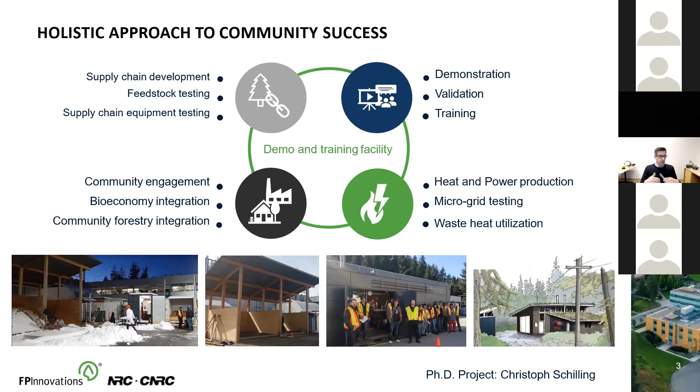I think the holistic approach that I put on the slide here is really key, that we work on all the different things that can go wrong and solve these issues before these systems go into the community, that we train. In the middle here, you have a picture from a training of Coscas members at FPInnovations, so that once the system comes to their community, they know how to operate it moving forward.

But when it comes to community bioenergy, I think we cannot talk about this without talking about the need to improve our forest management. And I think this is something that's true across Canada. I think community bioeconomy actually provides the opportunity to do that.

Again, I think this is something where we can learn and adapt from the experiences in Nordic countries and other European countries, where the solid forest sector has really helped promote these kinds of bioeconomy opportunities based on local resources. And I'm getting philosophic this morning, but there's a Finnish saying that forests are not inherited from our parents, they are borrowed from our children. And I think that's the attitude we need to develop here as well.

We don't have private forest ownership as many countries in Europe do, but I think this is the thinking we all need to start to adopt in order to be successful moving forward, and also to ensure that we're doing the right thing when we are managing our forests.

And I think there is plenty of opportunities that we're currently not tapping into. Commercial thinnings is one of those, using that material for our industrial processes, but also to power the bioeconomy in bioheat and combined heat and power projects that I just talked about. I think they can be used for pellets, for biofuels. This is a very large untapped resource that not only provides additional fiber sources, but also helps us reduce fire risks and increase forest resiliency to, for example, the mountain pine beetle attacks that we have seen.

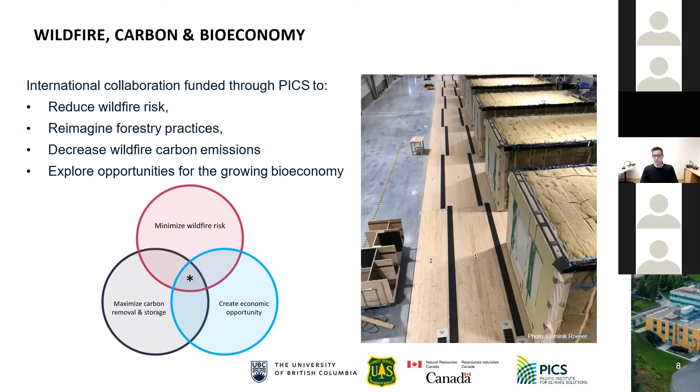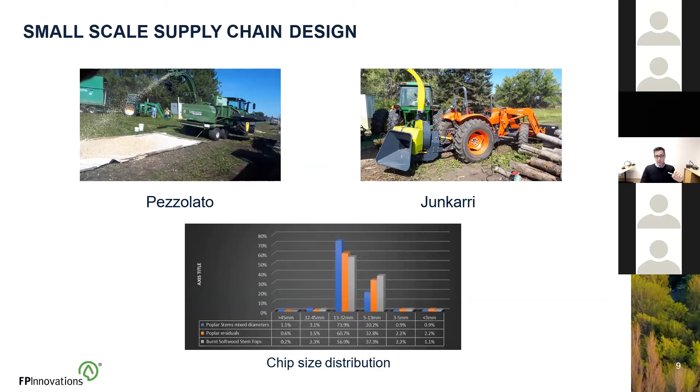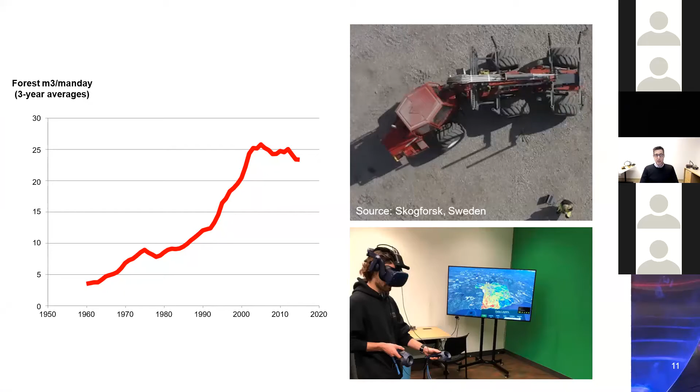But we also need to train the next generation of practitioners, and this is really targeted at a new way of doing forest management. We can see here in this graph that our productivity in forest operations has decreased since the 2000s due to all of the additional demands on our supply chains and foresters.

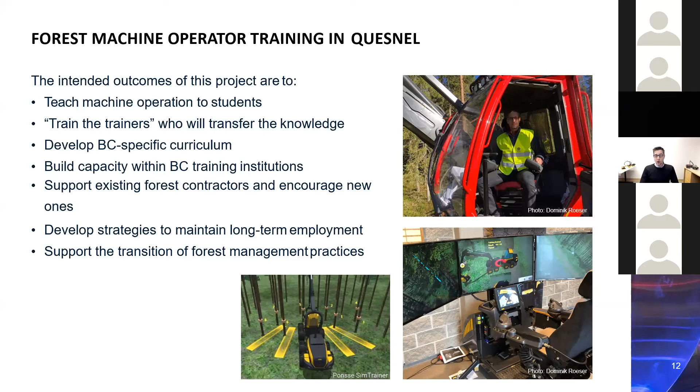That this is something we need to change, and we can change moving forward with advanced technologies and also operator training. This is again something we are working on with Quesnel, in training the next generation of forest machine operators so that they can make good decisions and know how to operate these expensive machines that we are bringing in. But I want to end with the built environment.

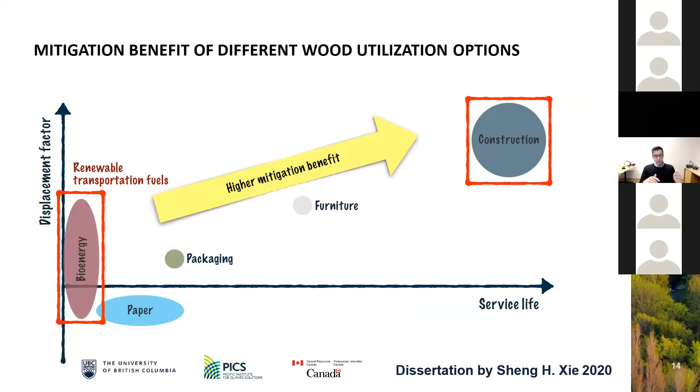And this is something that is right in front of us. I have a PhD student who's finished his thesis and is now a postdoc, who looked at the mitigating effect of different bioeconomy opportunities. We can actually see that the mitigating effect of bioenergy is much less than, for example, construction.

So what he's done, Sheng, is build different scenarios, looking at the base case scenario as is today, and looking at what if we use all the wood that we're producing in BC for construction, what if we use it for biofuel, what if we use the black liquor in different scenarios. I'm happy to talk to you about this in more detail.

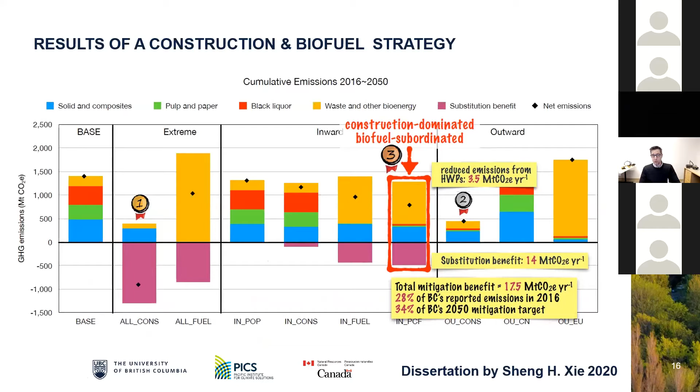But really what I want to stress here is that a scenario, number one, where everything is going into wood buildings, would be the best, but it's probably unrealistic in BC. A scenario where we're exporting less and not getting the substitution effect is also not a solution. So moving forward, a construction-dominated and biofuel-subordinated scenario, which here is number three, is the best option moving forward.

And the really important message here is that this is something we can do today. You can see here that this would mean building 280 Brock Commons buildings that we have here in BC, on the UBC campus, which is one of the tallest wood buildings in the world. This is the opportunity right in front of us, and we have a very large substitution effect in improving our climate change targets.

At the same time, in this scenario, we looked at renewable transportation fuels, but we could also look at bioheat and other bioeconomy opportunities that this might look very different. We went with the Clean BC plan targets, and that's why we looked in this particular case at transportation fuel.

But the opportunity here that I can't stress enough is the built environment, building in our communities, using wood in more buildings. I think we have very great initiatives here. Wood First, and our current government is really stressing mass timber production. We're seeing mass timber plants being built in communities across BC, and I think this is the opportunity that really benefits our communities and addresses climate change.

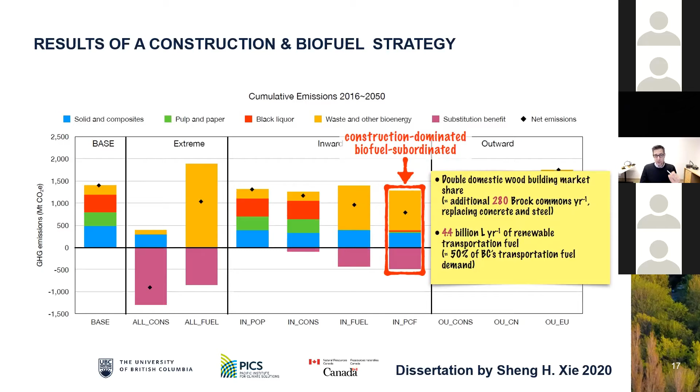This two minutes is not enough to talk about this, but if you're interested to learn more about this study, please get in touch, and I'm happy to share that with you. Thank you.

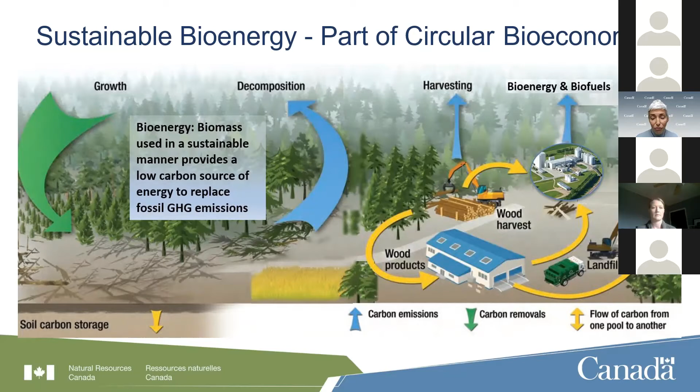In terms of the low carbon economy, what's important for us to keep in mind, as Dominic has alluded to, is the sustainability aspect of the biomass resources coming in. Keeping that in mind would allow many nations, regions, cities, and communities to consider biomass as part of their climate objectives, while also becoming more resilient and competitive.

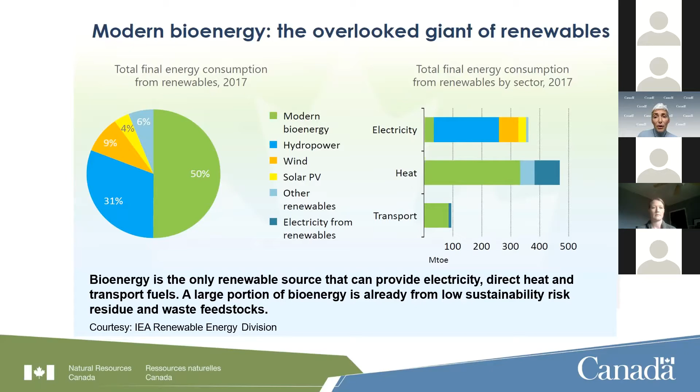If I take you to some of the most recent studies published by the International Energy Agency, in their 2019 report, they identified that modern bioenergy accounts for half of global renewable energy consumption. This is 4 times higher than wind and solar PV combined. If you look at the graph on the right-hand side, you'll see that the heat sector, in the context of modern bioenergy, is in fact the largest contributor.

As a bioenergy program, CanmetENERGY aligns ourselves with the policy directions of the federal government, naturally. Our aim is to advance these national interests through innovation in the conversion of biomass resources for the production of heat, power, and fuels, which could be in the form of solid, liquid, or gaseous.

Now I want to take a higher view and give you a quick overview of how things stand in Canada as it relates to bioheat and combined heat and power installations across the country. This is something we've been doing since 2013 with the help of Torchlight and Jean, so we now have about 7 years of data. We are focusing on the commercial and institutional sector particularly, looking at the size range from 50 kilowatts all the way to 5 megawatt scale. Our last data survey was completed in March 2020, and we plan to do that again in the near future. Our latest data suggests there are just over 460 bioheat installations in the country.

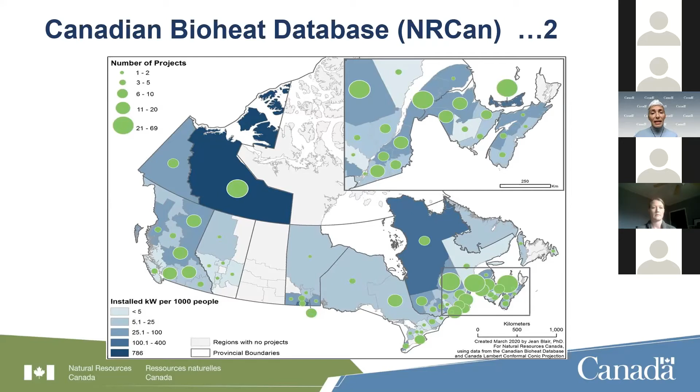The other thing worth highlighting is that the majority of installations captured in this database, close to 75% of them, are under 1 megawatt thermal capacity, and almost all of them are based on technologies coming from Europe.

We're taking this large data set and specifically focusing on what kind of trends we're seeing in the community-owned projects. As you can see here, there are 75 community-owned projects located in 66 communities. What's interesting to highlight is that the majority of them are located in rural and remote communities, and in fact, the majority of these rural and remote installations are in Indigenous communities.

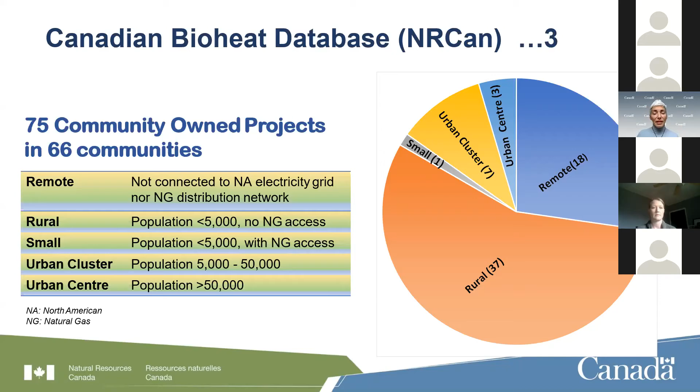If you look at the choice of fuels being used by these communities, the data suggests it's almost 50-50 between wood pellets and wood chips. That really comes down to where they are located and what scale of installations they have, which seems to be a determining factor for which fuel to choose.

One other thing I'd like to mention before I wrap up this bioheat section is the importance of favorable policy regulations as well as funding programs, whether at the provincial, territorial, municipal, or federal level. The right policy environment with funding programs seems to have a big impact on the development of these projects. But I'd also like to highlight that we are still at the very early stages of development for bioheat and community energy systems in Canada, and we have a huge untapped potential that we could all benefit from.

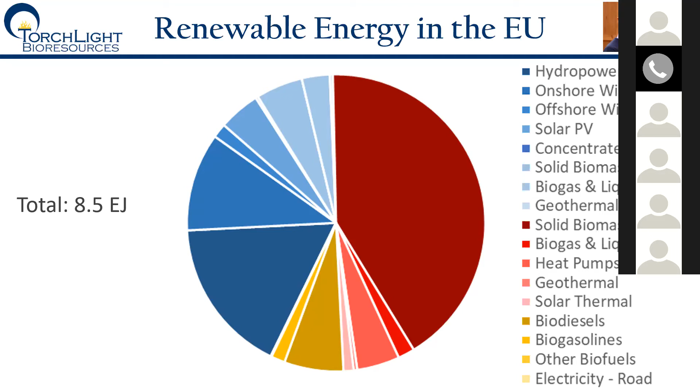Shabnam already showed the global contribution of modern bioenergy to our renewable energy mix. Just an example, in the EU we see bioenergy, and specifically solid biomass, contributing 84% of the renewable heating market, which is actually the largest renewable energy market out there. In fact, the amount of energy supplied by solid biomass heating, largely wood, is equal to all renewable electricity generation combined, including large hydropower.

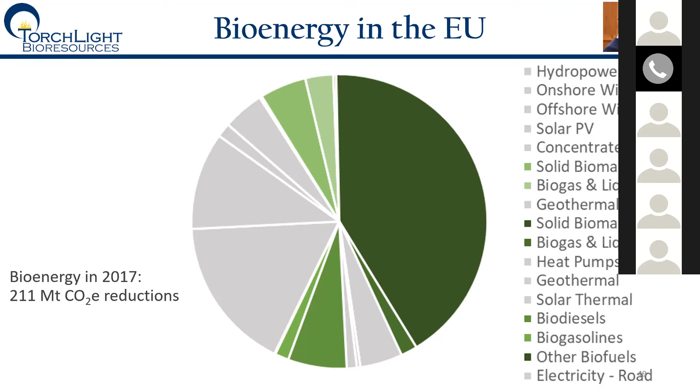This slide is essentially an extension of the previous one, but shows that in the EU, which is obviously leading climate mitigation efforts, bioenergy represents fully 60% of all renewable energy and was responsible for over 200 million tons CO2 equivalent annually. So dramatically more than any other renewable. So why bioheat utilities?

Well, number one, I believe that this is where municipalities can not only contribute, but are absolutely essential to both climate mitigation goals, but also when it comes to community resilience and ability to provide affordable clean energy for their citizens.

So number one, it enables use of local wood fuels. Really, particularly when we talk solid biomass, it's about utilizing what is available locally, and therefore creating the largest number of local jobs per unit energy. As I already mentioned, bioenergy as a whole has a 90% share of the renewable heating market, and that includes things like biogas and renewable natural gas as well. In many cases, despite creating the most number of jobs, it's also the lowest cost renewable form of heat.

When we talk about how to actually use wood and wood fuels for GHG reductions, heating in particular is the most efficient use of that wood from a GHG reduction perspective, even if it's replacing natural gas. That is because of the high efficiency of modern heating and combined heat and power systems. Because you're utilizing a local fuel, the fuel pricing and hence energy pricing can be very predictable. Ten to twenty-year supply agreements are possible in some cases.

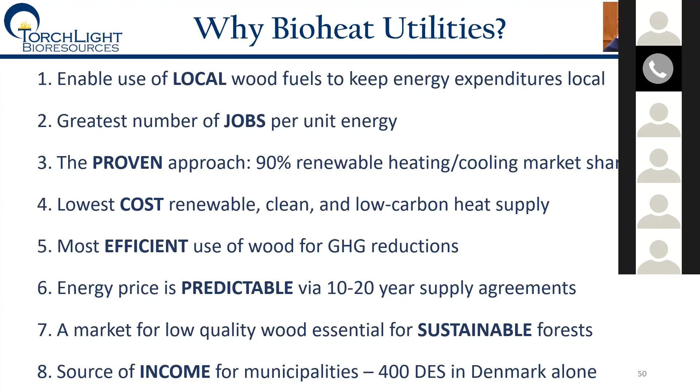Slide 5, please. So what does a municipal district heating utility look like? Well, there's kind of two technical approaches. One is where you actually have pipes in the ground that are carrying hot water, and so this is what we consider district energy. These can involve off-the-shelf wood chip pellet boilers. When you get to larger scale, combined heat and power plants.

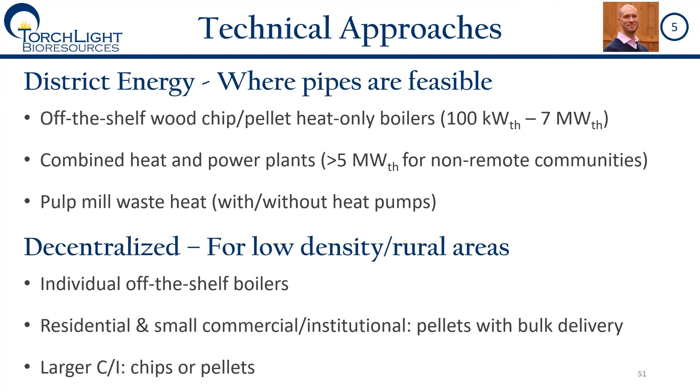And for those communities that already have a pulp mill in their community, there's a lot of waste heat that comes off those pulp mills that is actually another form of bioenergy and can be used for heating buildings. For those communities that are much lower urban density and largely spread out, we can actually have a municipal distributed utility, if you will, without the pipes. This is individual off-the-shelf boilers, an approach that has already been implemented by some rural municipalities in Canada for things like septic systems, whereby the municipality owns and in some cases operates distributed infrastructure at other people's properties.

Slide 6, please. So what is district energy? Essentially, it is hot water pipes underground running heat from a central plant to a variety of buildings. It's only about a meter down, so it's actually in the frost, and in many cases that's a much easier utility and infrastructure to operate than water sewer.

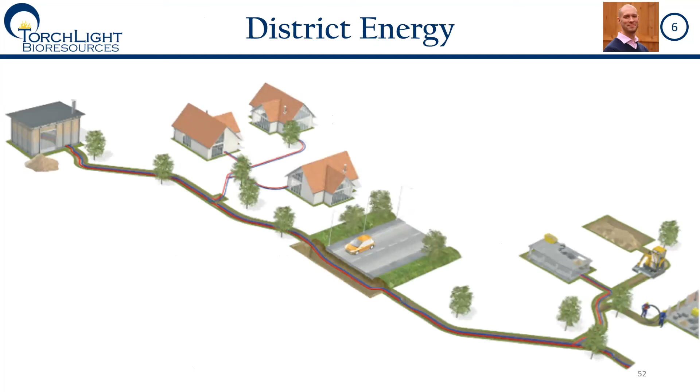Slide 7, please. So essentially, there's a central energy plant fueled by a variety of fuels, and that's one of the wonderful things about district energy, you're essentially moving hot water. Anything that can create hot water can supply energy to this type of system, so that's why we call it future-proof infrastructure. It connects buildings to hot water, and within each building there's essentially a heat exchanger that transfers the energy to the internal building heat distribution system, whether that's forced air, hydronic, which is essentially radiators or in-floor heating, or some other form of heat transfer.

In many cases, these are municipal owned, and we do have some examples, with some Ontario ones listed, but there's obviously lots across the country, about 180.

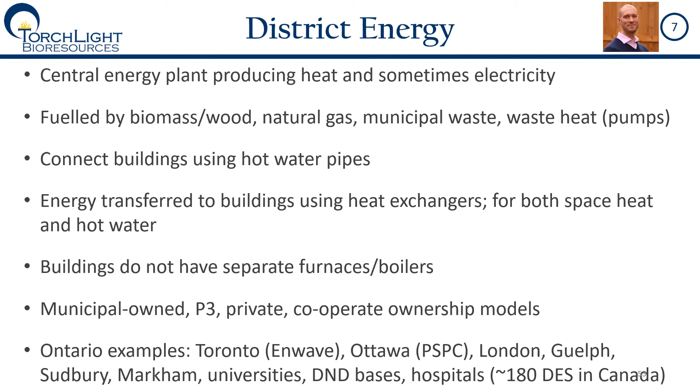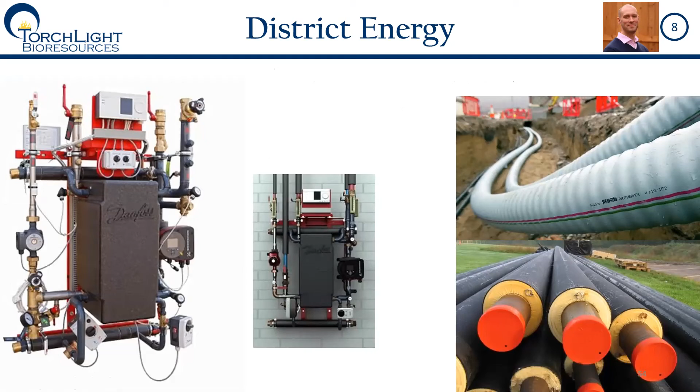Slide 8, please. This provides in a few pictures. On the right, you see the PEX pipe, so this is plastic piping. Below that is thin wall steel, so this is for the larger demands. And then what you see on the left is the in-building heat transfer center. Basically, it's measuring flow and heat differential, and that's how you're able to monitor, and then, obviously by extension, bill for heat consumed. Slide 9, please.

So why does it make sense for municipalities to be in the district energy and broader bioheat utility business? Well, they're already in the water and sewer pipeline business. District energy is just another two water pipelines.

And as I've already said, much lower maintenance and much lower difficulty to actually operate than, say, a water and sewer system, because it's a closed system and you don't need to treat the water or the wastewater. However, we spend a lot more money on heating our buildings than we do on water and sewer, and therefore it can be a massive increase in terms of utility revenue and income, depending upon the model the municipality decides to use.

Really, I don't believe that municipalities should be in the pilot or demo project business, and that's why this is all commercial technology. There are thousands of district energy systems in Europe heated with wood. This is simply replicating what has already been developed over many decades.

It's future-proof infrastructure. If at some point we come up with some magical way of producing much lower cost energy, these district energy systems are simply just another route to distribute that heat. We all need to heat our buildings regardless of what happens in the world. And unlike natural gas or hydrogen pipelines, this isn't reserved for one type of fuel, it's any type of heat. It allows us to utilize the lowest cost fuels, particularly from the forest sector.

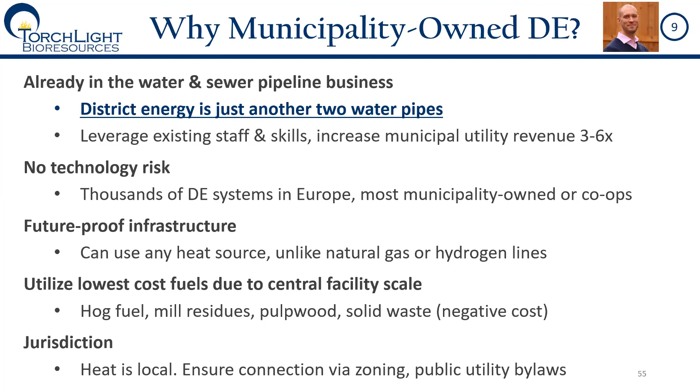Slide 10, please. So why does this matter? Well, Canada is actually the highest per capita consumer of space and hot water heating in the world. The only countries that are comparable are the Nordic countries.

And why this matters is because in Canada, what we see is we obviously have, as a nation, a relatively low carbon intensity electricity grid, but electricity is only 17% of our end use energy consumption.

So slide 12, just a quick example to wrap up. This is an example from Sweden, which I just mentioned. Stockholm has a citywide district energy system. It peaks out at about 4,000 megawatts thermal, 350 kilometers of transmission lines, almost 3,000 kilometers of distribution lines. Over 90% of buildings in Stockholm are connected to the system, which is owned by the city of Stockholm in partnership with Fortum, which is majority owned by the Finnish government, actually.

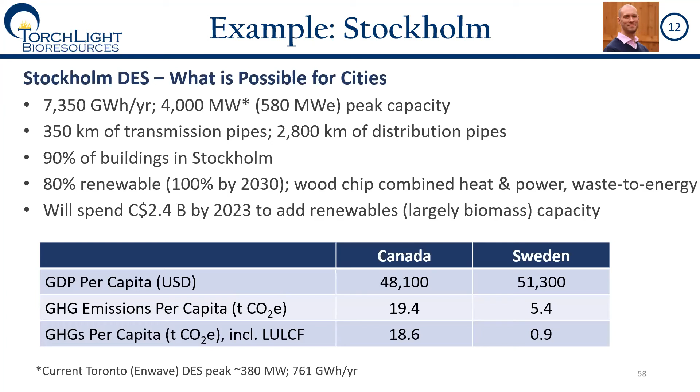This is what is actually required to decarbonize cities in Canada. This one plant generates as much heat, or twice as much heat as the largest district energy system we have in Canada, which is downtown Toronto, owned by Enwave. Chips are delivered 80% by marine, 20% by rail, and this one plant reduces emissions by 650,000 tons per year.

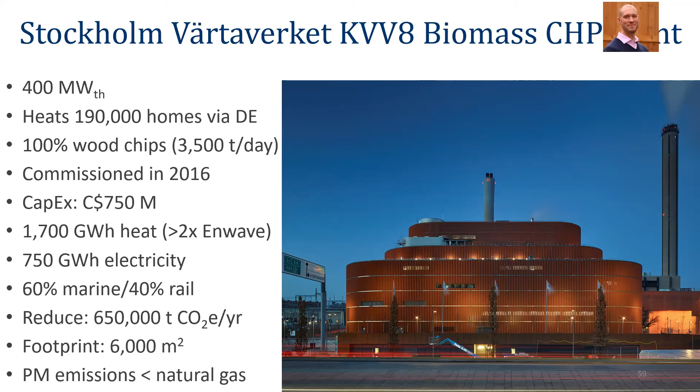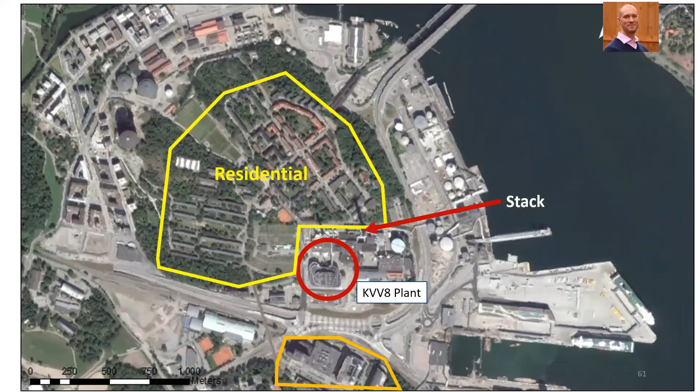Thank you, Jamie, for some really good information for municipalities on the role that they can play in developing bioenergy or bioheating systems in their communities. We've gone a little bit over time with the presentations, so we don't have a ton of time for questions. We definitely won't get to all of the questions in the Q&A box, and I believe we're going to try to follow up with written responses for the participants after the session. But we will hit on a couple of them.

The top question here, I'm just going to answer this one quickly because I know the answer and in the sake of time: why were there so many more community-owned projects in 2014 in Sebnem's presentation? 8 of, I believe it was 12 projects in 2014 were in Quebec, and that was the first year for the Residual Forest Biomass program, which provided funding for community and other commercial institutional bioheat projects. I think in general, the right policy environment for bioheat, especially from a community perspective, is the availability of funding to help with the capital costs, because they are pretty high.